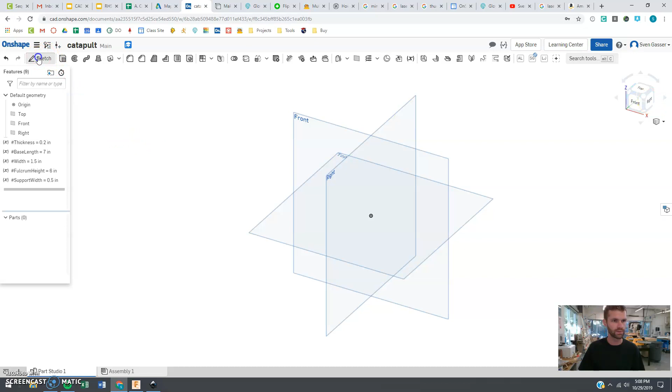So let's get started. We are making the side kind of A-frame shape, the support here. So we are going to start a sketch, and we're going to click on this right plane.

All right, I'm going to hide some stuff. I don't want to see all these right now. And we're going to start with a rectangle.

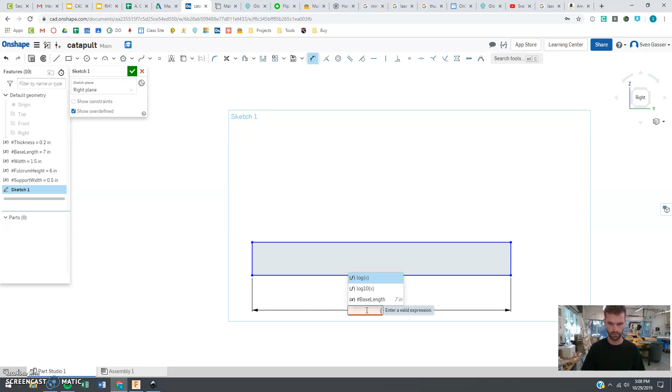And this rectangle, the dimensions should be length - base length - and the other dimension here should be the width of the support.

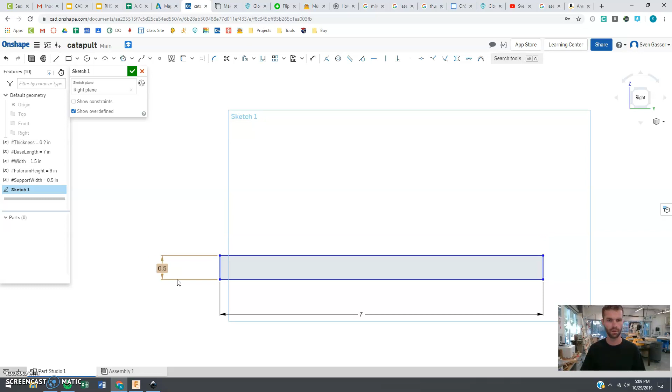All right, and then we are going to make ours symmetrical. So let's find that midpoint. Oh, there it pops up - see that square? That's going to tell us it's our midpoint.

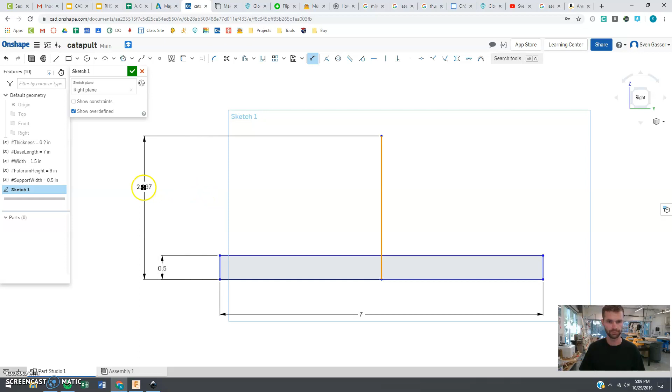And we are going to dimension this to be our height of the fulcrum. And there we are. We got a good start going here.

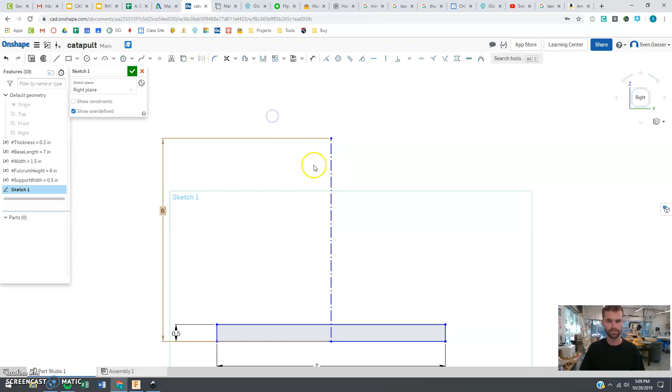I don't want this line to be an actual line. I want it to be... wait, there it goes. All right, I want that to be an actual construction line, because this is going to be the diameter of

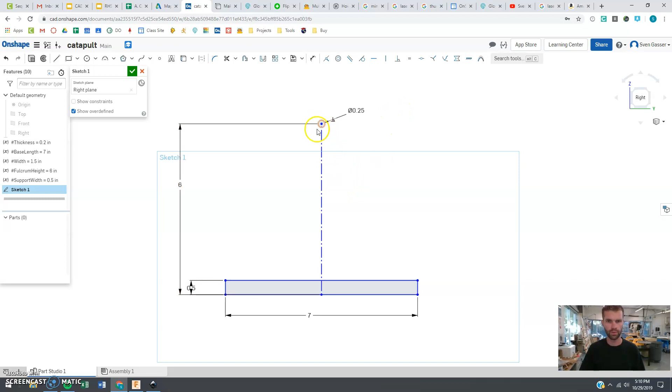a dowel we're going to use. And these dowels, they're in the boxes over here - I'll show you where they are in class. It's going to be a 1/4 inch dowel, or 0.25. All right, so now we know where that center spot is going to be, and we have the base.

Now is simply connecting all our pieces here. So let's jump back here, and we will make a nice line, and I want to go above here, give it plenty of space.

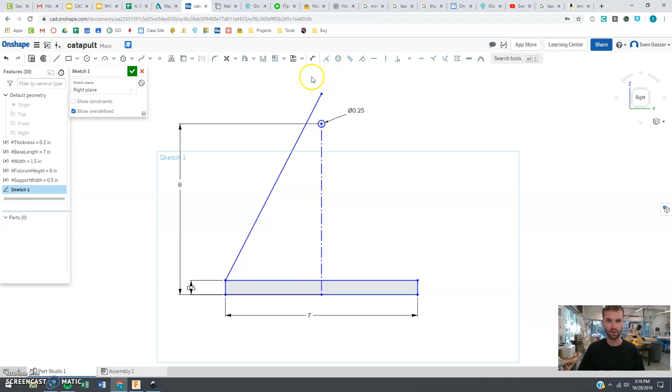And that looks pretty good. Now we can offset - where's our offset tool? There it is, offset. And we can pull that out.

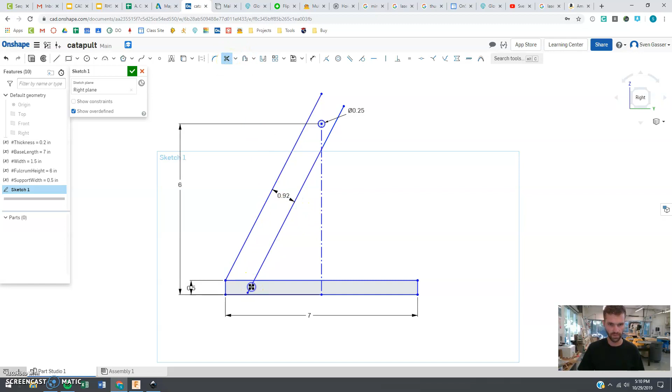That's going to end up being bigger than what we want. We'll just ignore that width piece there for now. All right, we'll push enter, and let's trim off some parts we don't want. I don't want this anymore either, and I don't want that anymore.

And now we will mirror these two pieces. Oops, I did not select that correctly. All right, we're mirroring these two pieces. You kind of get the idea here - I'm making a big triangle here with a hole in the top.

And you're welcome to kind of change that shape. This kind of looks a little skinny down here. I agree, maybe I want to make that bigger - I don't want that to be... that's 0.75. That makes it a little better. I'm looking right there, so I could have changed it back over here.

But anyway, you get the idea - make it look good. And then you are welcome to extend certain things if you want. If you needed some extra supports or anything like that, you might want to come back to this later and add to it. But that is the general start of our piece here.